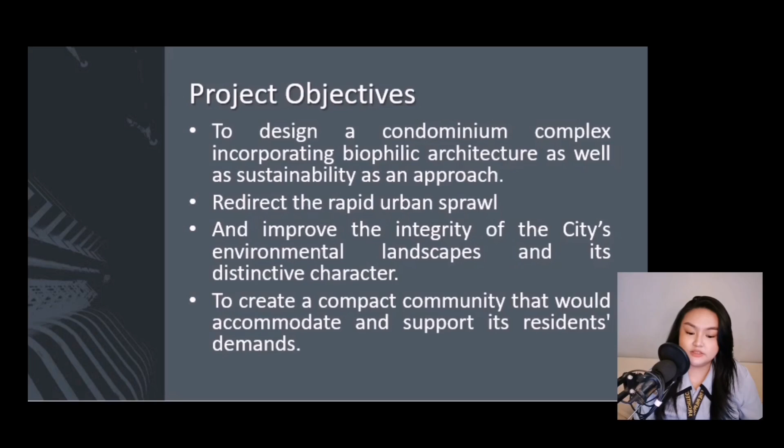The client would be the Rixons Corporation, which is physically located at Fairview, Quezon City. The project is a condominium complex on a corner through lot bounded by the BIR Road, the Quezon Avenue, and EDSA. The project scope and limitation will be based on the standards of the Quezon City zoning for land use and building height, the National Building Code of the Philippines, Fire Code, and Plumbing Code for the space allocation.

This is the design process. So the chart depicts the designer's movement through each stage of the project. The first one would be the problem discovery and identification, followed by the data gathering, the ideation, the identification of the design constraints, providing solutions, enhancement and revisions, then followed by the presentation of the final output.

Chapter 2 is about the site justification. Site assessment is crucial to the infrastructure success. This is a thorough examination of the property subject matter and the environment that will aid the project's rationale and design.

Taking into account the size, accessibility, kind of soil, and other factors of an existing site, the site's drainage, terrain, temperature, orientation, vegetation, as well as its susceptibility to natural disasters, as well as the socio-economic and cultural factors such as the site's potential, the ease and access to the main road, whether the lot is located in an urban area, the accessibility to significant existing facilities and buildings, and the compatibility with the adjacent lot. The legal institutional factors such as the land use and zoning, the ease of ownership, the cost, and the compatibility with the adjacent lot are also taken into account.

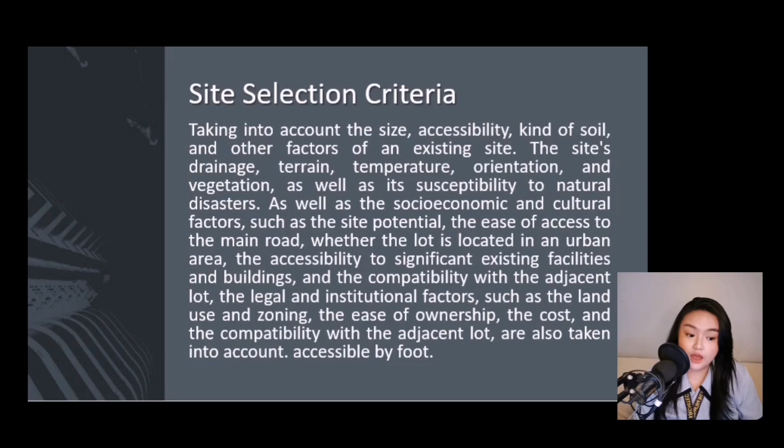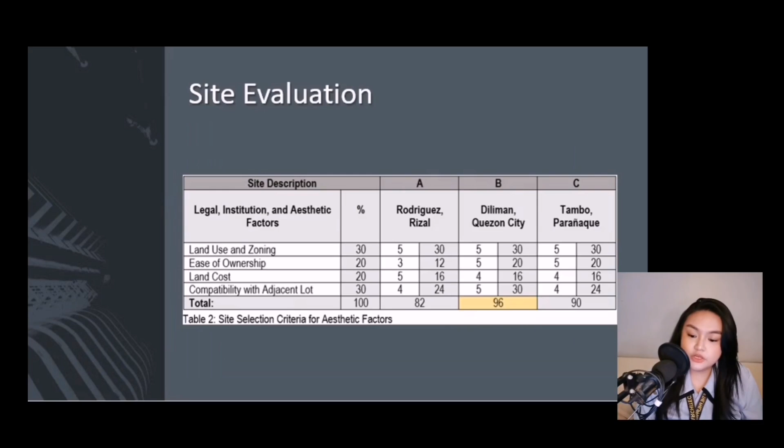The site is evaluated based on natural, environmental, and physical factors, followed by the legal, institutional, and aesthetic factors. Next would be the socio-economic and cultural factors. The site with the highest points based on the site selection criteria is Site B, which is geographically located at Diliman, Quezon City. It has accumulated 94 points in natural, environmental, and physical factors, 96 in legal, institutional, and aesthetic factors, and also 96 in socio-economic and cultural factors.

The proposed project is well suited to Site B due to the following factors. The land area of the property subject matter is enough to accommodate all the spaces required for the proposed project. The land is highly accessible to the main road as well as the pedestrian, making it easily accessible. The land is not vulnerable to any natural hazards. The land is massive enough and has enough space available for any future expansion to meet the demand. The site is easily accessible and close enough to well-known spots. And the site is also in a walkable distance to a public transportation terminal.

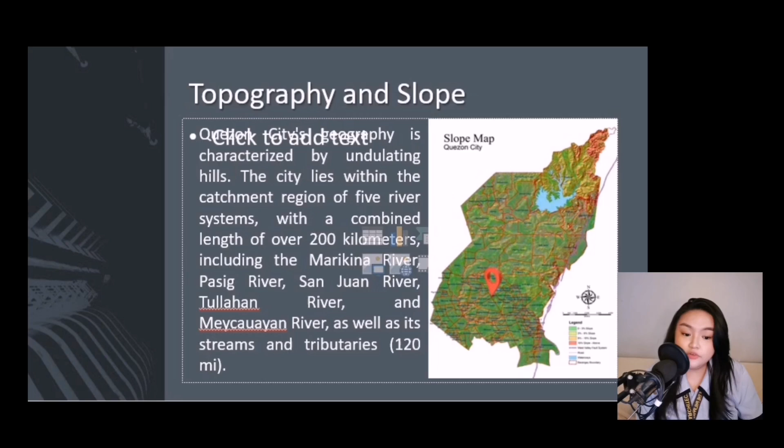Quezon City's geography is characterized by undulating hills. The city lies within the catchment region of 5 river systems, with a combined length of over 200 kilometers, including the Marikina River, Pasig River, San Juan River, Tullahan River, and Meycauayan River, as well as its streams and tributaries.

For the kind of soil, according to a survey by the Bureau of Soils and Water Management, Quezon City contains 5 soil types, namely the Novaliches Loam Series, San Luis clay, San Manuel clay, Burgos clay, and escarpment. The Novaliches Loam Series is one of the most frequent soil types across the city, sometimes known as adobe. It is a firm and compact kind of soil.

This is the microsite analysis. This would be the sun path. These are the main roads. As you can see, there will be noise pollution here. And this would be the southwest monsoon, also known as Habagat. This is the northeast monsoon, also known as Amihan.

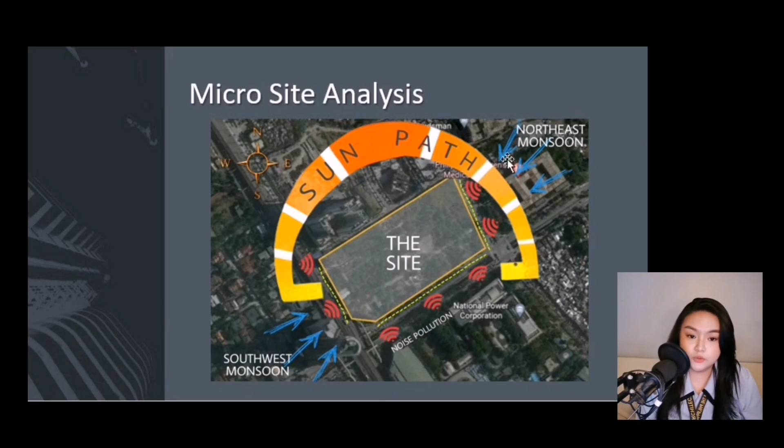For the topography, the terrain of the city, which is located on the Guadalupe Plateau, is mostly undulating, with alternating hills and flats. The southern part of the city features a flat topography, while the northern half is undulating and culminates in the Novaliches Reservoir or La Mesa Dam, which holds the water supply for the majority of the region.

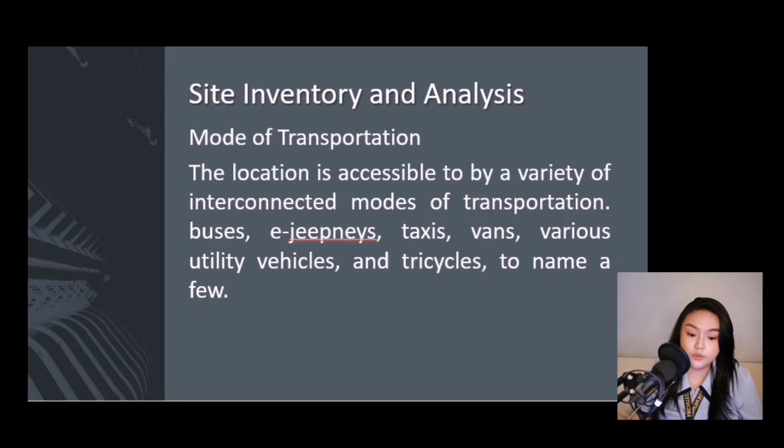The location is accessible by a variety of interconnected modes of transportation such as buses, jeepneys, taxis, vans, various utility vehicles, and tricycles, to name a few. The property subject matter is geographically bounded by EDSA, Quezon Avenue, and BIR Road.

For the utilities, the main provider of electricity would be Meralco. Then the north and west of the city are under the concession of Maynilad, while the southeast is under the concession of Manila Water. For the telecommunications, it is provided by several, and to name a few are PLDT, Bayantel, Digital, Multimedia, and Eastern Telecommunication Services.

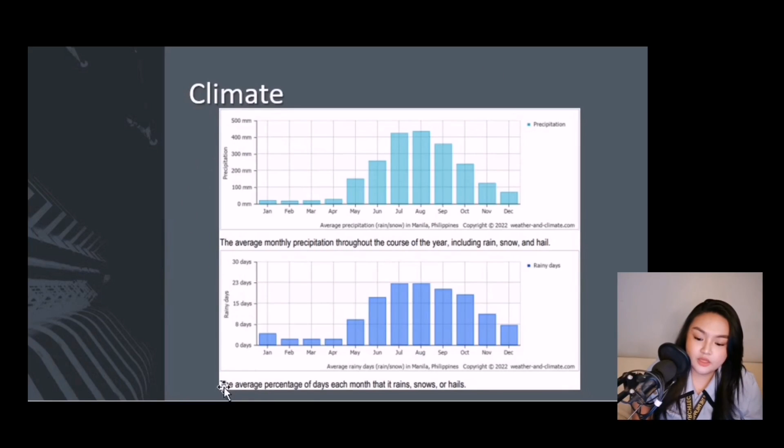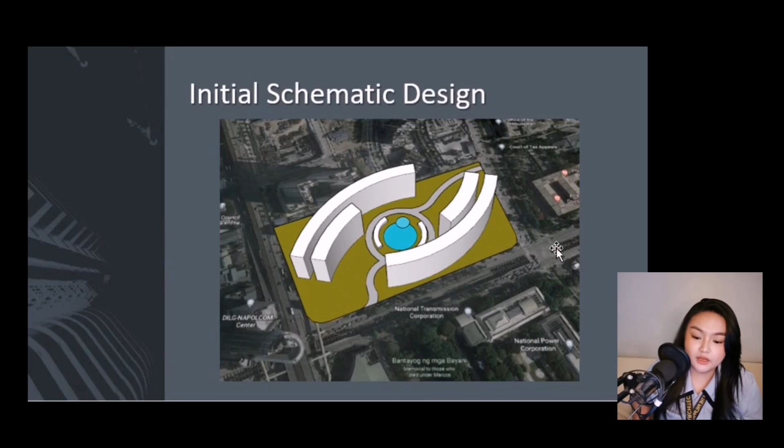So the following are the laws and guidelines on which the proposal will be based to formulate a design that is efficient and functional according to its use. We will consider the National Building Code of the Philippines, the Accessibility Law, the Fire Code of the Philippines, and the amended Quezon City Zoning Ordinance.

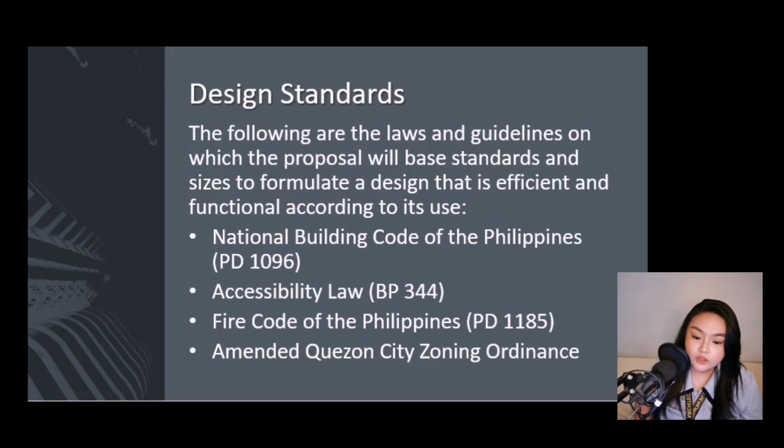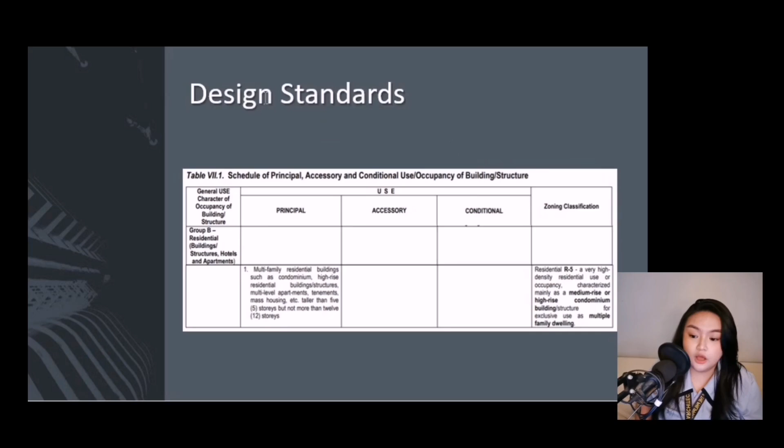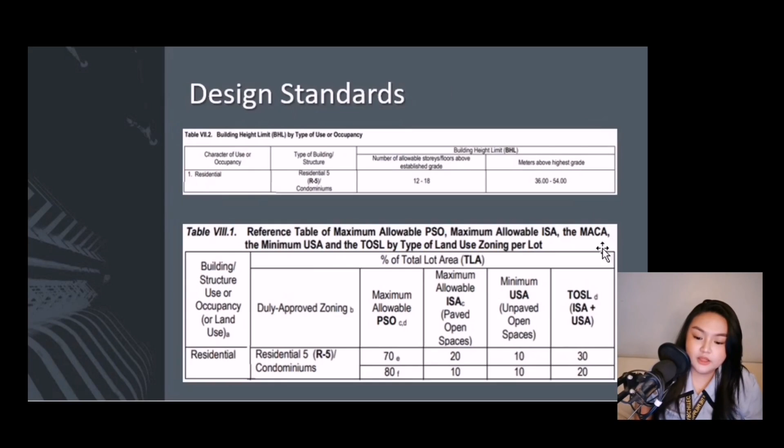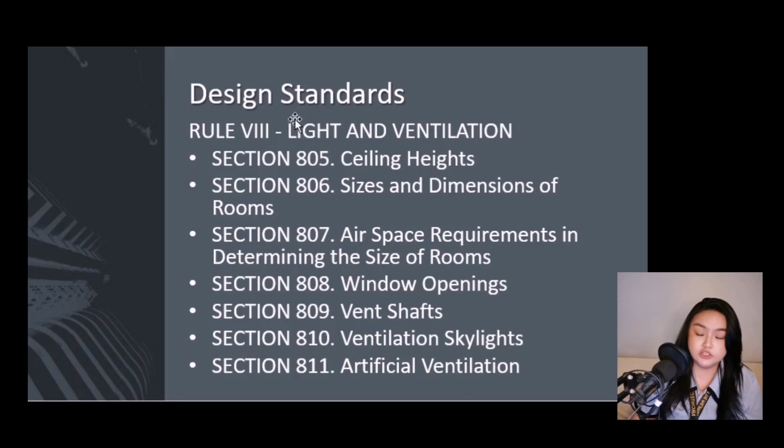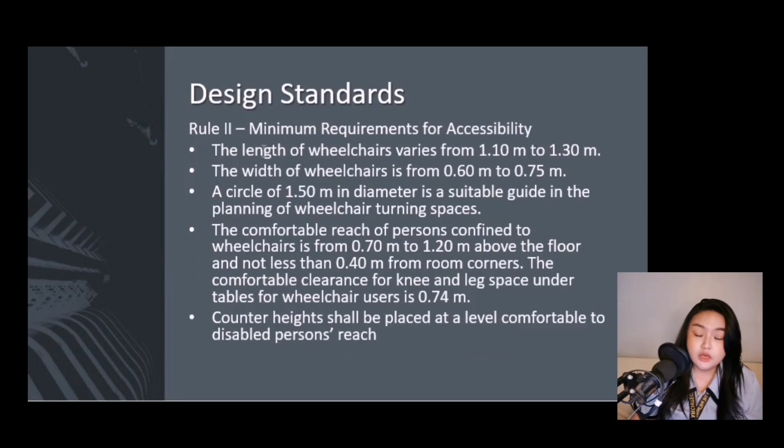For the environmental systems, considering the direction of the structure as well as the windows and their sizes, because of its inherent capacity to ventilate and expel filthy air. Well-insulated structures require less heat-producing power, such as artificial ventilation. Water conservation techniques such as rainwater collecting and recycling help reduce the amount of fresh water used and consumed.

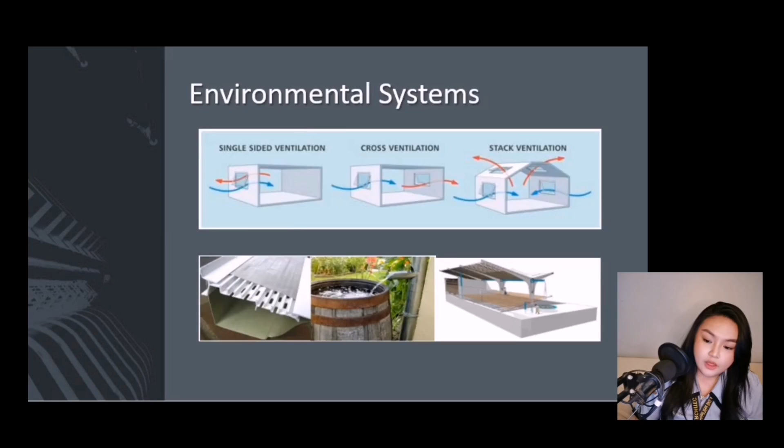This would be for the structural system, so we will be using masonry pier foundation, reinforced concrete slab, rigid structural frame, and Dutch gable roof. For the utility systems, we have the HVAC system that includes the centralized air conditioning unit, the air handling unit, and the cooling tower, as well as the cistern, rainwater storage, and the elevator. Then for other technical issues, we have the CCTV system and the smoke detector.

And for the specialized allied services, we have architectural interior services, structural engineer, sanitary engineer, site development planning, security evaluation and planning, building testing, and commissioning. For the case studies, we have the Marahuyo Residences, which is located in Pasig City. This is the One Serendra, located in BGC. And for the international one, we have the Corals at Keppel Bay, located in Singapore.

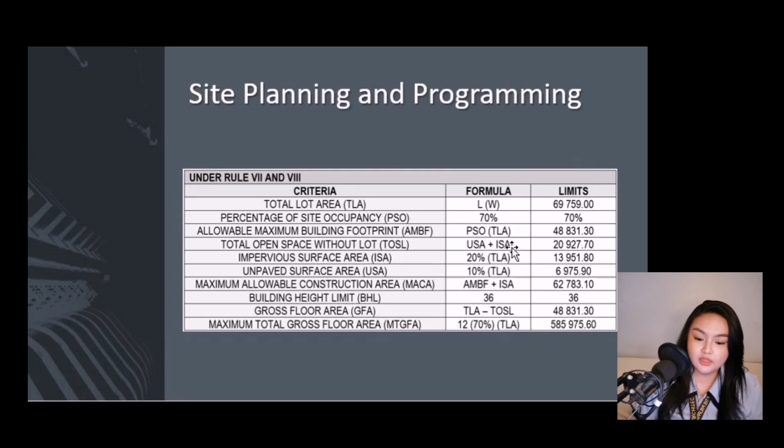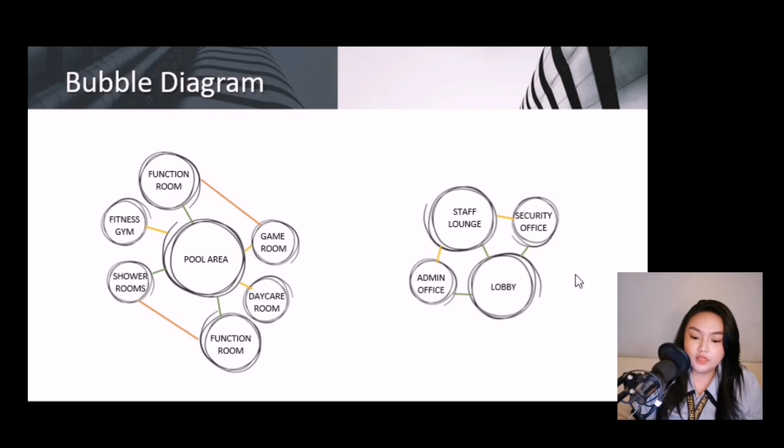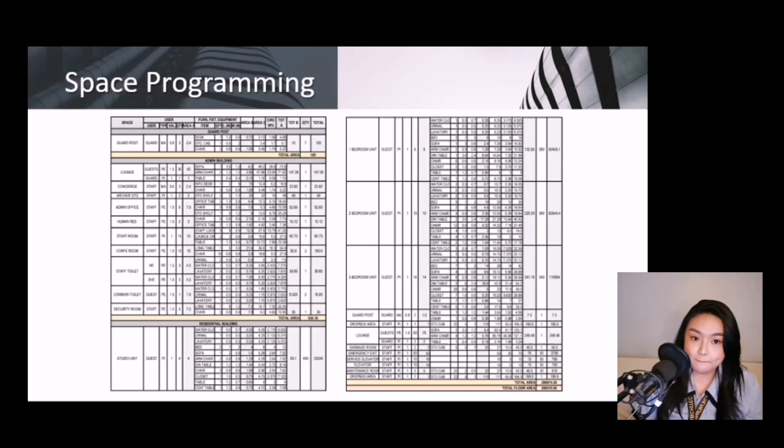This is for Rule 7 and 8. So we have the formula here and the limits. So for the user analysis, we have the residents and the staff. This is the space analysis. So as you can see, these are the spaces that will be planned. This is the bubble diagram. This is for the amenity area, this is for the admin building, and this is for the residential building. This is the matrix diagram. This is the space programming.

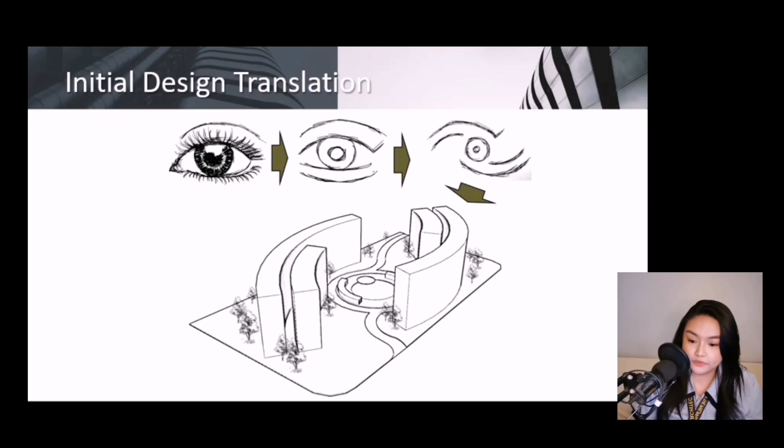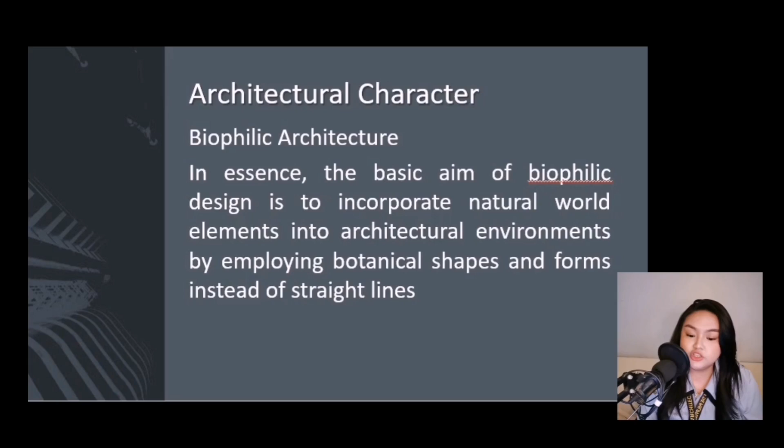These are the design constraints. So we have economic, environmental, ethical, safety, and sustainability. This is the initial design translation. So from here, then it will go. So the architectural character would be biophilic architecture. In essence, the basic aim of biophilic design is to incorporate natural world elements into architectural environments by employing botanical shapes and forms instead of straight lines.

The innovations would be smart building: access control, security system, lighting, HVAC systems, and other systems are automated using a variety of solutions. They improve efficiency, safety, and comfort while offering cost reductions that are more closely aligned with the objectives of the property owners, employees, and managers.

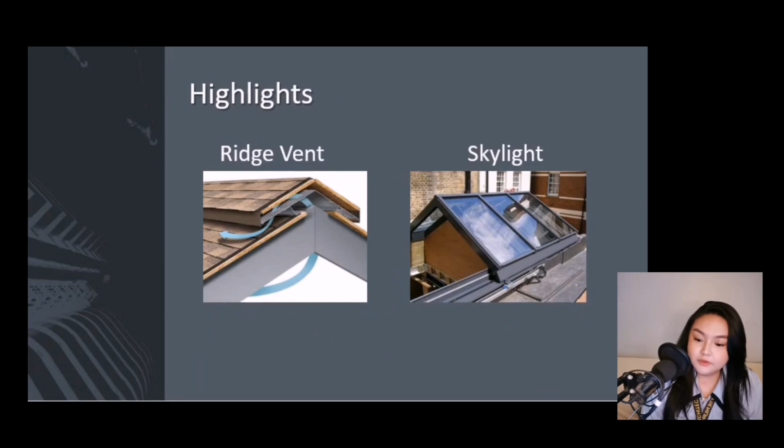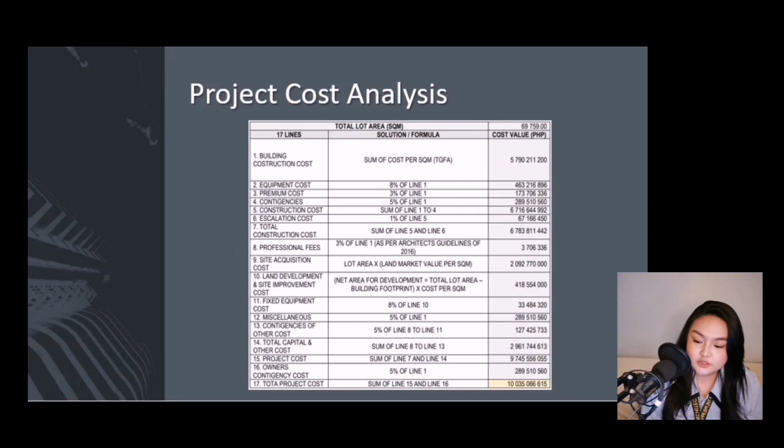The highlights would be ridge vent and skylight, and the concept would be terracotta rain screen wall cladding, perforated metal panels, exterior shading system, aluminum composite panels, sustainable concrete, and this would be the project cost analysis. And this is the life cycle cost analysis.